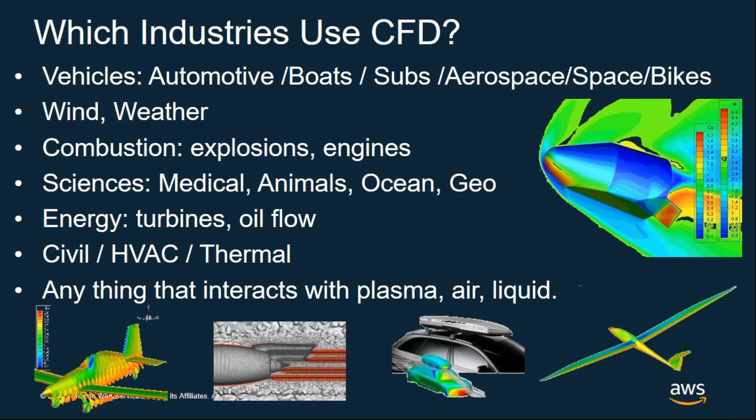So what we're going to cover today are some CFD processes and why AWS. That's sort of a level setting because of the broad audience that I expect are watching this. How to set up a simple single node CFD infrastructure, how to set up a cluster to run large CFD applications. I won't be able to show you the entire demo - I've pre-baked some things so that we'll be able to move along and get this webinar completed in the time allotted. We'll go through some CFD best practices and also discuss some CFD tools that are available.

I don't want to spend time trying to talk about which one is better or anything. I have no intention to offer opinions on such subjects. This is just to demonstrate some of the things that are available on AWS.

Okay, so let's first do some level setting. Talk about the CFD process. When people talk about CFD and think of CFD, so often it's only the solver solving the partial differential equations for the fluids. But there's a lot more to CFD, and so I do want to talk about that.

We have multiple steps. Geometry cleanup first of all - geometry is usually coming from some CAD package that is not adaptable to the CFD process, and there has to be some manipulation there.

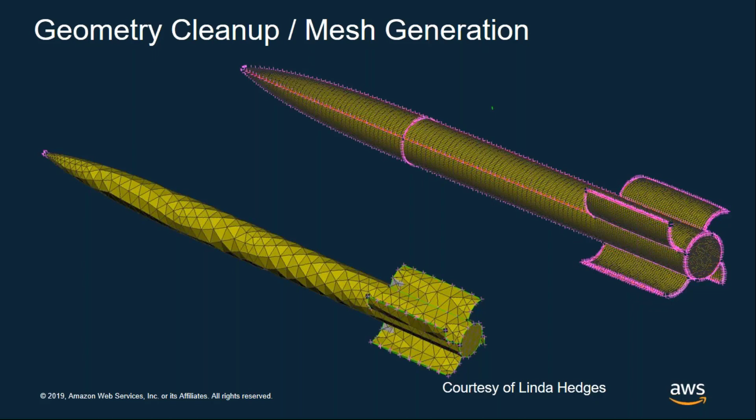So here's an example of sort of the first step, geometry cleanup and mesh generation. This isn't so much cleaning up an error in the geometry as it is just cleaning up the surface by making a tighter mesh. You'll notice the lower one has a lot of faceting. If you were to try to get a high fidelity solution and solve for the boundary layer on that, you'd get complete garbage.

Mesh generation is something that has taken years to perfect, and now there are many tools. I'm always amazed - I've been at this since the 1980s. The mesh on the right is what we call structured; you can see the nice structure in there. The mesh on the left is unstructured. Most codes today are leaning towards unstructured just because the meshing is so much easier.

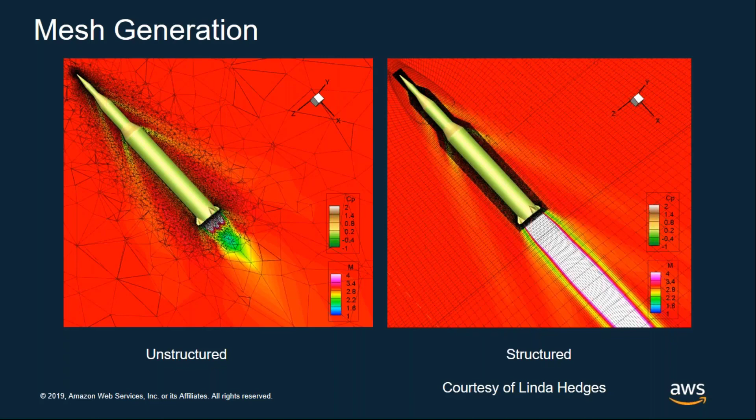I should mention that these steps I've just referred to used to be, and still are, kind of the lion's share of the human work involved. There's a lot of tools that have improved this, but I always go back to a benchmark of one of my colleagues when I was working at NASA back in the early or mid 80s. He did the first full space shuttle simulation. Generating the mesh for that took 6 months of his time. So if the solver is only taking a few days, the time was all in this geometry and mesh generation. And while we've improved on that, most of the manual labor that goes into any solution still lies there.

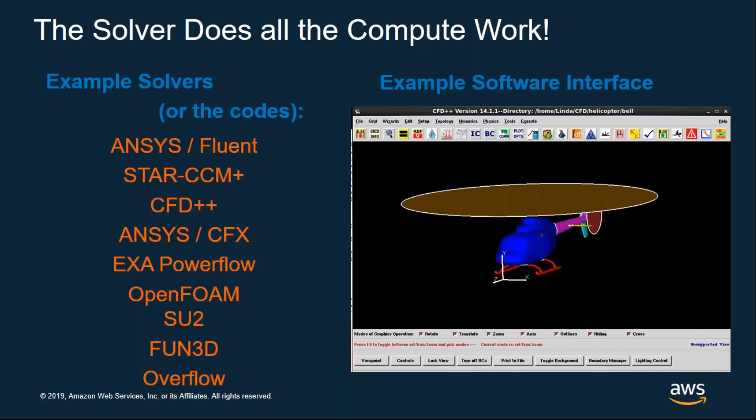So the solver really does all the compute work, and that's why we focus on it so much. It's not necessarily the most intensive time in terms of human input, but it is the most intense time in terms of the computer, and probably the costliest in some ways - although, depending on what your engineering time costs, maybe not. Many solvers are available, and I apologize in advance if I've missed someone's solver. I didn't intend this to be a complete list. There are many different flow solvers out there.

So why AWS for CFD? I mentioned one reason, which is all our instance types or node types that can be optimized for different steps. But also a big factor is really our scale - our agility to scale to many nodes if necessary, or to run many jobs in parallel. Running jobs in parallel, as we'll see in the next slide, is actually what one of our customers does, and it saves them so much time - that's engineering cost in that time savings.

With running many jobs in parallel, we can eliminate HPC resource contention, because you're not having a bunch of people jump on a computer, sit in a cluster, and wait in a queue for their jobs to run. Instead, you submit or create a cluster for a job. Think cloud is very, very different than an on-prem situation where you've got a fixed size. In cloud, you can scale to virtually as much as you want. I'd like to say infinite - we're not an infinite resource, but we are large.

I'll use an example of one of my colleagues who did a proof of concept and was able to launch 1.3 million cores in the spare capacity in the London region. There's a blog post on that if you want to look it up. So there's no queue - you basically create your cluster, submit your job, run your job, and it's done.

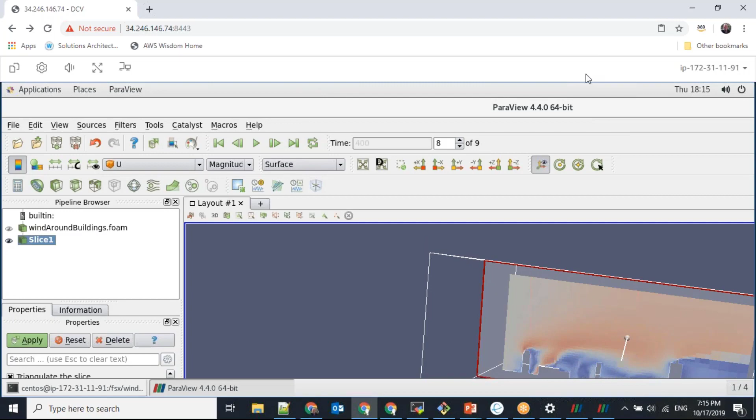I'm going to reconnect here because in my time that I was off waiting, it disconnected, and I'm going to make this screen large. Okay, so I've already launched ParaFoam, or ParaView, sorry, so that we can have a little time here to explore it. And unfortunately, my window isn't that big. But anyways, here's this solution,

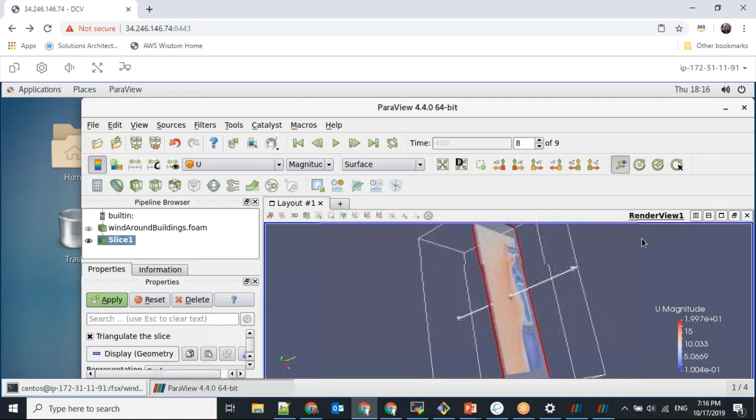and it allows me almost instantaneous adjustments here. I can play around with this, and if I had a very complex geometry, this would allow me to manipulate it and do whatever I want totally interactively. And so DCV is a really great product. And I realize I don't have my mouse with me, so I can't do everything I want to do very easily. But this is just an example of DCV.

We didn't do the X Windows version of this before, but you can take my word for it. This is much more responsive, and this is how DCV works. And it doesn't matter whether I do this on the web, so this is just a web browser that I've pulled up, or if I use the client on my laptop.

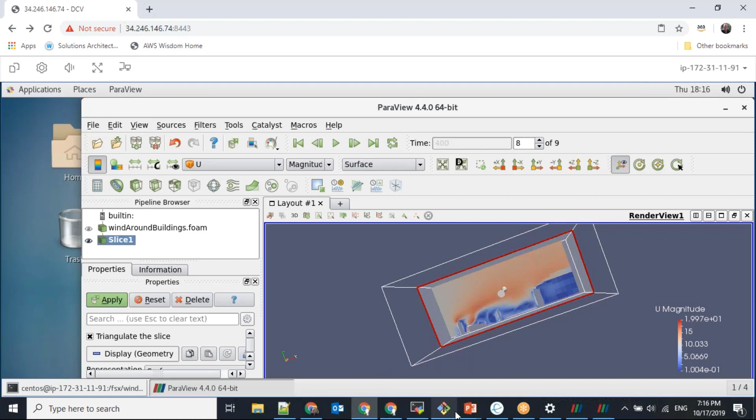Okay, so installing any software is the one thing that unfortunately takes a little more time, but again, vendors of various software packages help you, and you can have tutorials and stuff that allow you to do it quickly. There's an enormous amount of stuff online.

So cluster best practices on AWS: one of the most important things is you want to use something called a placement group. If you use ParallelCluster, there's just a simple line of text, a command that basically enables the placement group. A placement group grabs all of your nodes in close proximity to each other.

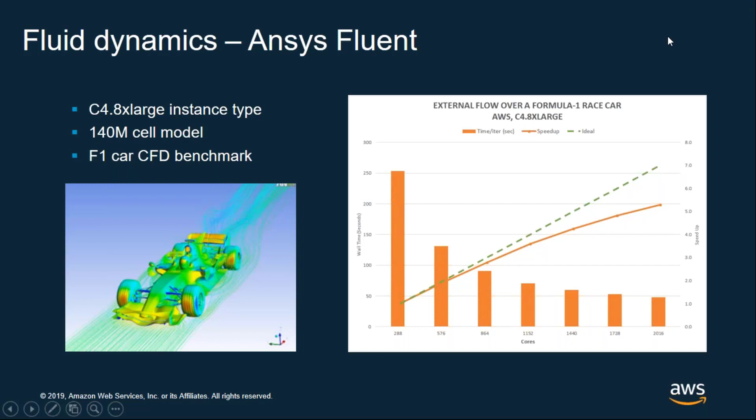Another very heavily used code, ANSYS Fluent, runs very well on us. There's a new blog out with some data on the C5 instance type, but this is an old classic standby that shows the performance of our C4.8xlarge instance, so our last generation. The blog I'm talking about is here, running ANSYS Fluent on AWS ParallelCluster. Best practices. Again, you can probably Google this, and the preliminary benchmarks, which unfortunately are not yet available for public consumption, are very competitive with the Cray XC50.

In fact, the data that I've seen lies right on top of it, scaling out to 3,000 cores, or almost right on top of it. Okay.

CFD++ is a density-based unstructured mesh code. It uses a multi-grid accelerator. It's very well known in aerospace, not so much in other fields. This is a place where, because of the multi-grid accelerator, it actually probably is affected by network latency more than most CFD codes. And this is where we've seen a huge improvement with our Elastic Fabric Adapter.

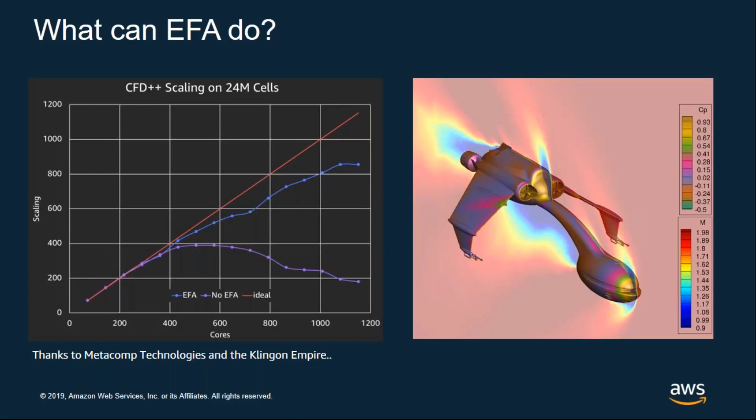Without EFA, our Elastic Fabric Adapter, we can see that above about 500 cores, we've plateaued. Basically what's happening here is we're taking the same problem, spreading it out over more and more instances, or nodes. It's just slowing it down. There's too much communication. Whereas the blue line here is with EFA, and we see we can scale out to 1,000 cores with CFD++. This is on a 24 million cell simulation. So we really see that in this particular case, network latency is somewhat of an issue.

So let's just talk about latency. Most people know of Amdahl's law. Amdahl's law is such that if you were to take a fixed size problem and spread it out over more and more cores, how does that scale? Gustafson scaling is actually a little different, where instead we look at how that problem scales if we increase the problem size as we increase the cores. So you double the number of cores, you double the problem size. How well does that scale?

So if we look at latency, both Amdahl and Gustafson scaling are dependent on mostly non-parallel code. Parts of the code that just do not parallelize well, or serial parts, like if you're reading an input file, that's going to be serial in general, although it can be made parallel. But there are parts that are non-parallel. Memory latency, outside of the non-parallel code, tends to be the bigger issue with CFD applications.

Cache latency. There are ways to improve cache latency, which I'll talk about in another slide. All the CPUs have caches where they're trying to manipulate data or load data faster. Network latency is always there, although in CFD it's not the driving latency. And then storage latency. Okay, so you have to remember that latency isn't about one thing, it's about all of it.